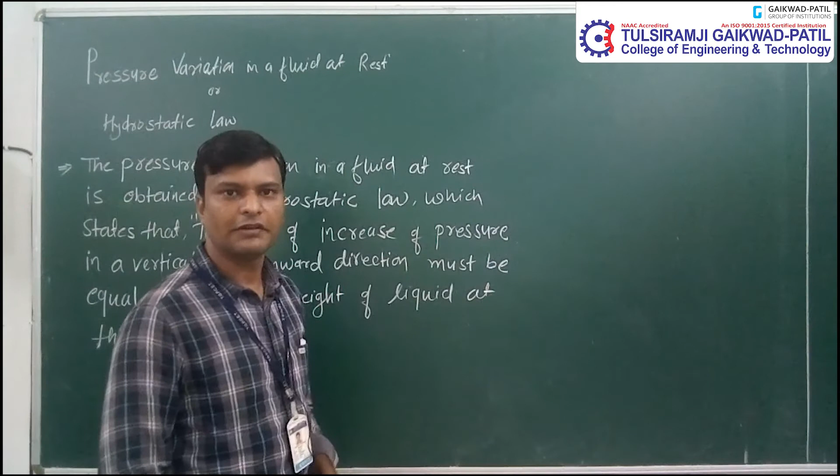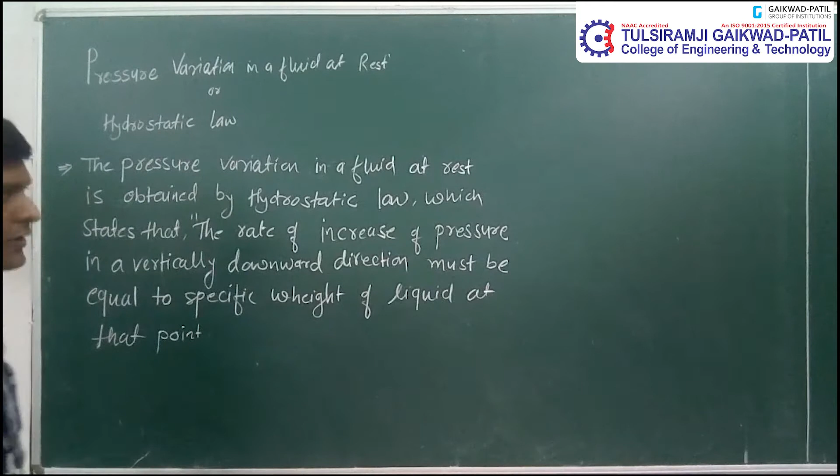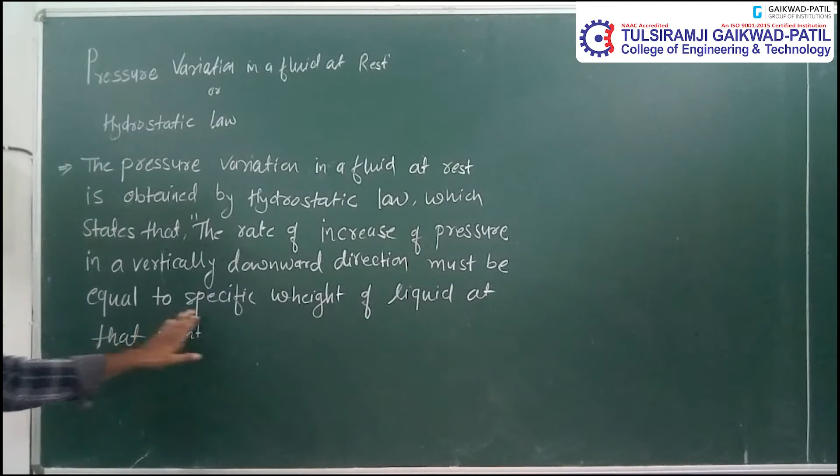Hello everyone, this is Professor Vishwjeet Ambade from Mechanical Engineering Department, and today's topic is pressure variation in a fluid at rest, or we can say the hydrostatic law. The statement of the hydrostatic law is: the rate of increase of pressure in a vertically downward direction must be equal to the specific weight of the liquid at that point.

For that we consider a container having liquid, and this is the small fluid element, having delta H, and this is the height of the fluid element from the free surface of the liquid.

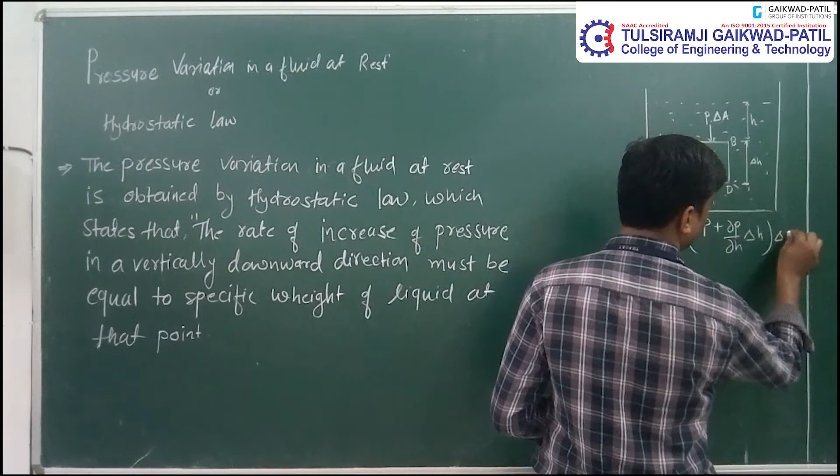This is the pressure which is acting on the face AB, which is considered CD, ABCD, and this is the small area. You can say that the small area delta A is the small cross section area of the fluid element, and this is the pressure which is acting in the downward direction. Delta H, this is del H, and this is delta A. So this is our consideration.

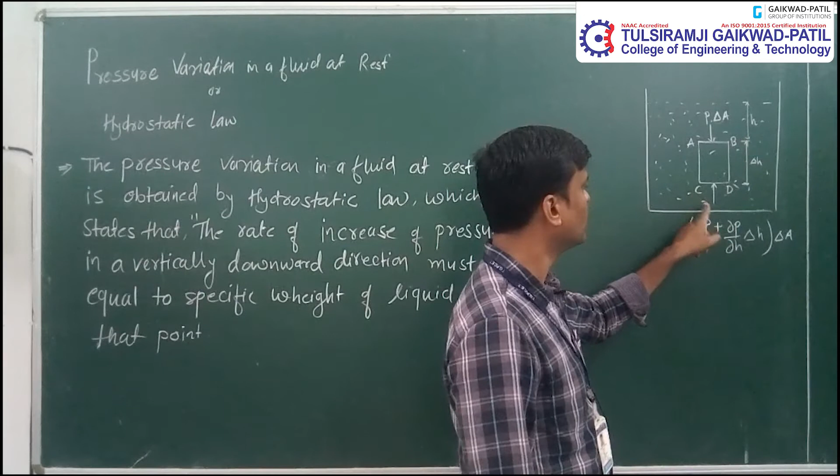What we have considered, this is the small fluid element to be considered. Delta H is the height of that fluid element. Small h is the height of the fluid element from the free surface. P into delta A is the pressure force acting on face AB, and P plus del P upon del H into delta H into delta A is the pressure force acting in the vertically upward direction on face CD of that particular fluid element. So this is the statement.

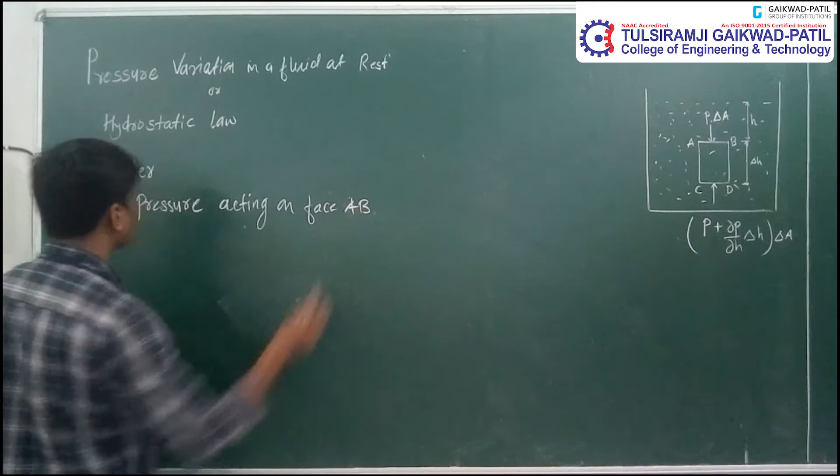Now consider small p be the pressure acting on face AB, delta A the cross sectional area of the fluid element.

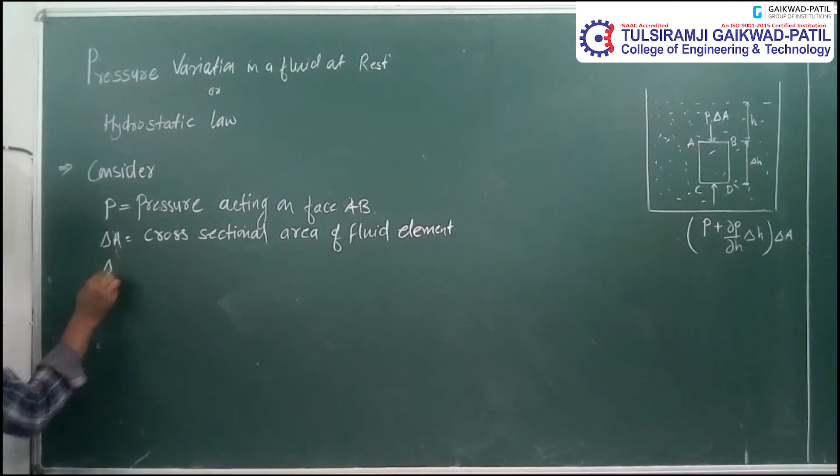Delta H is the height of the fluid element. Now small h is the distance of the fluid element from the free surface of the liquid. Is it clear?

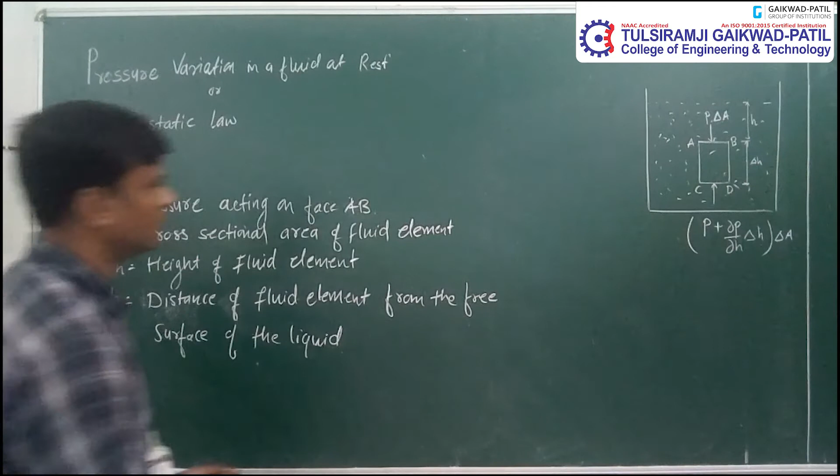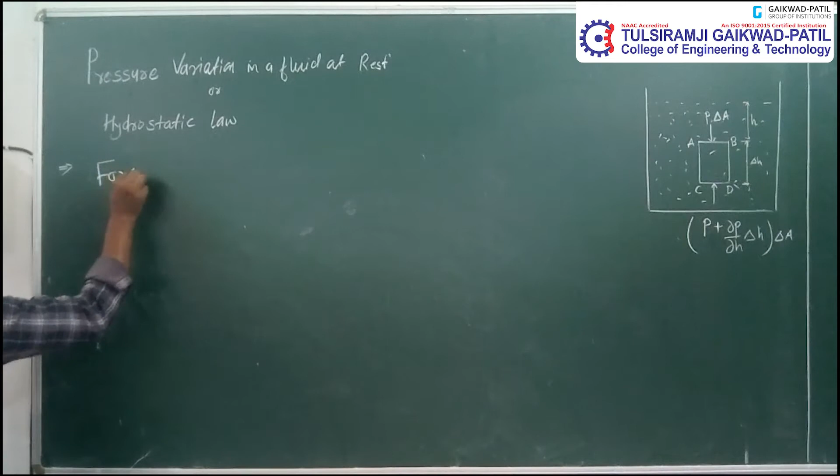Now these are our assumptions. So again now, forces on the fluid element. Now what are the various forces acting on the fluid element?

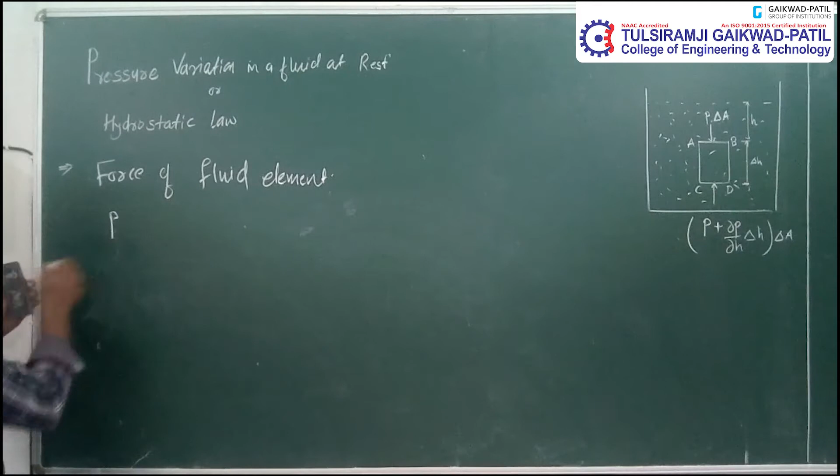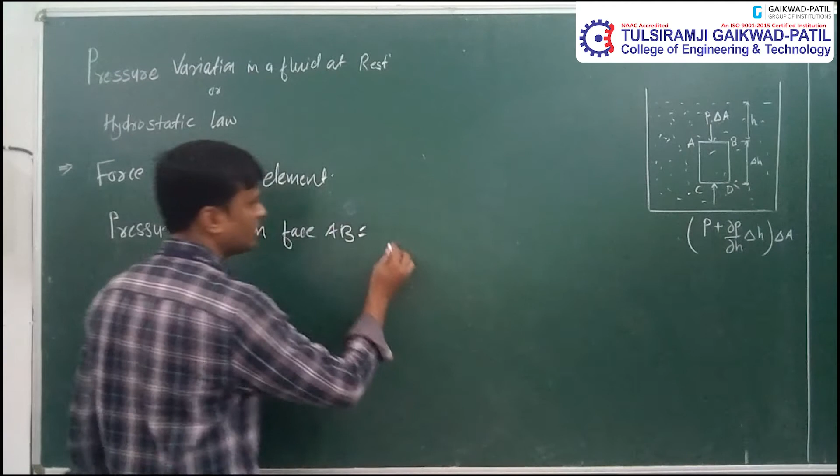So first force is the pressure force on face AB. This force which is acting on face AB is P into delta A.

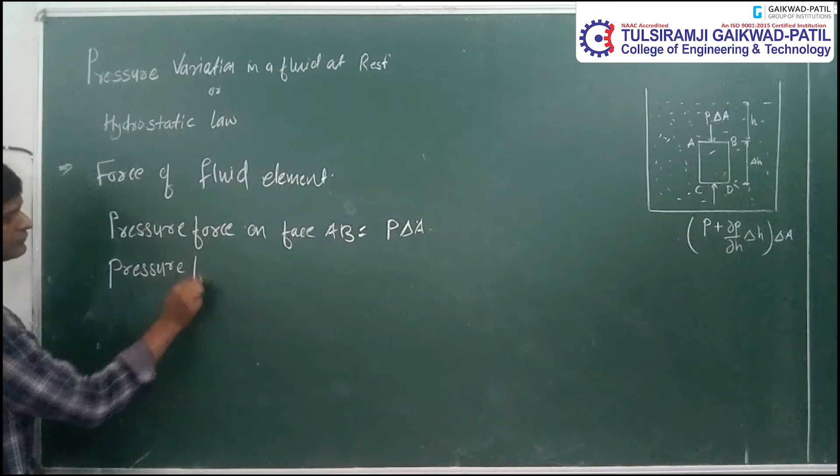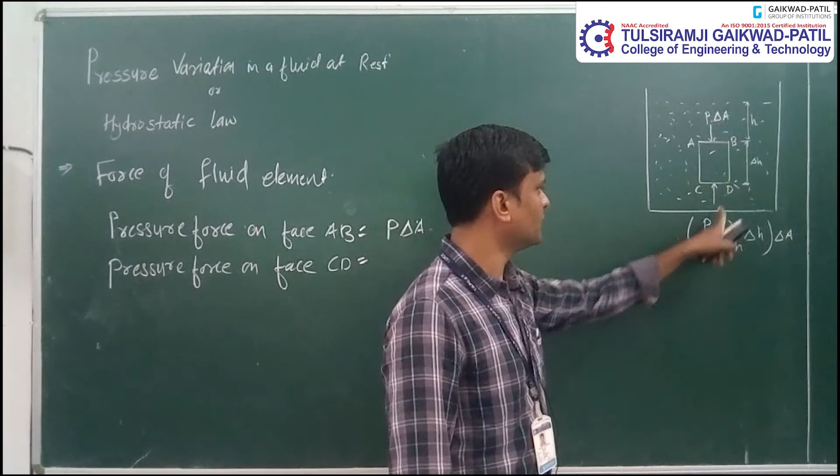Now, pressure force on face CD. What is this? This is the pressure force acting on face CD in the vertically upward direction. How much? P plus del P upon del H into delta H into delta A.

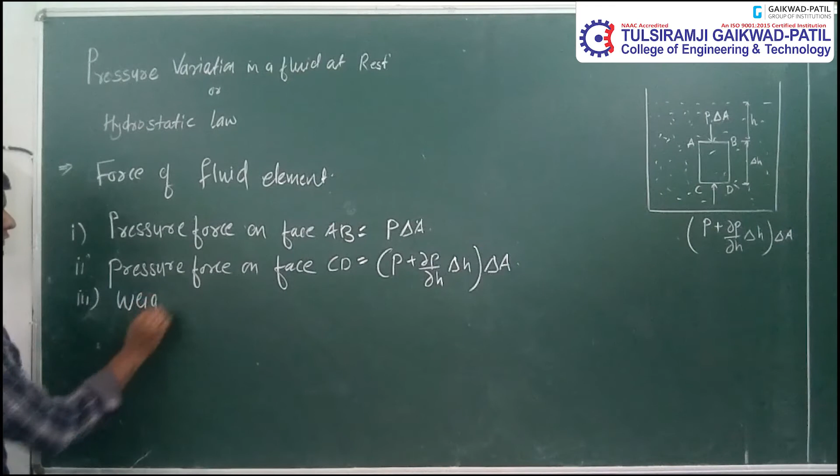Now third, weight of the fluid element. The weight of the fluid element is again acting in the vertically downward direction. And what is the weight? Density into volume. So the density of the fluid element is nothing but rho into G, and volume is del H into del A. This is the volume and this is the density of the fluid element.

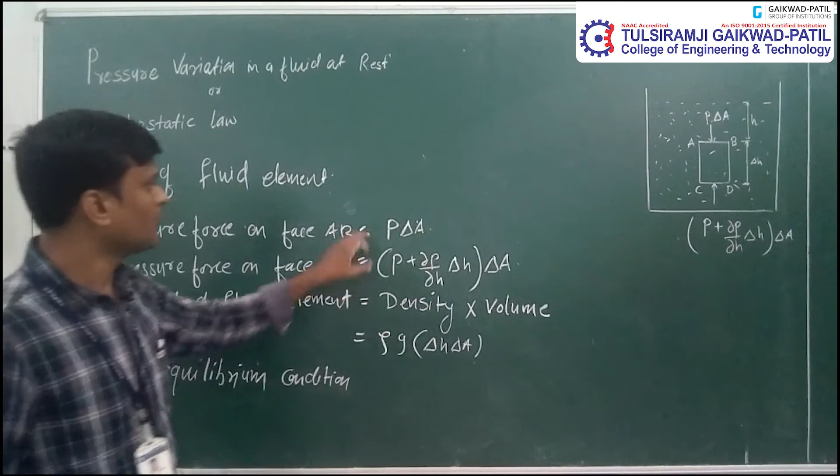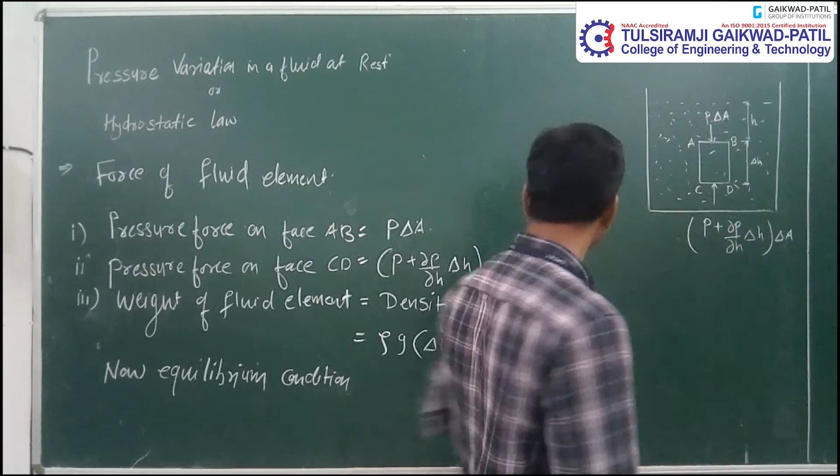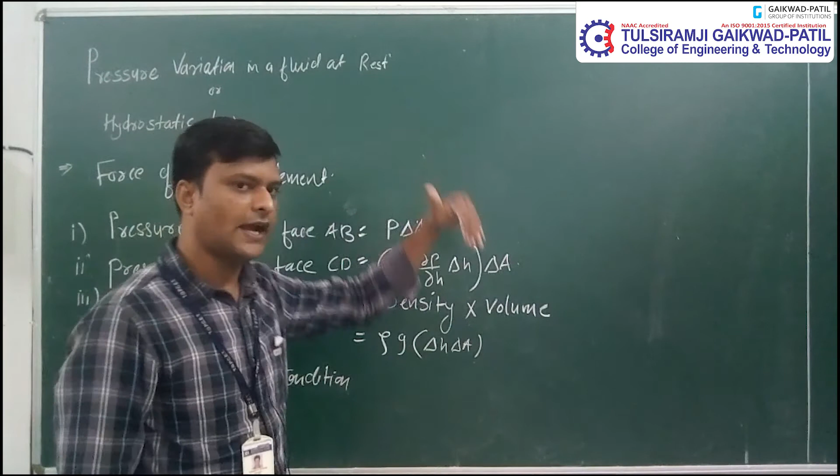Now for the equilibrium condition, we can see here, this is the force P into delta A which is acting vertically downward on face AB, and this is the force acting vertically upward on face CD, and simultaneously the weight of the fluid element which is again acting vertically downward. Therefore, for the equilibrium condition, there are two forces acting in the vertically downward direction, and one force acting in the vertically upward direction.

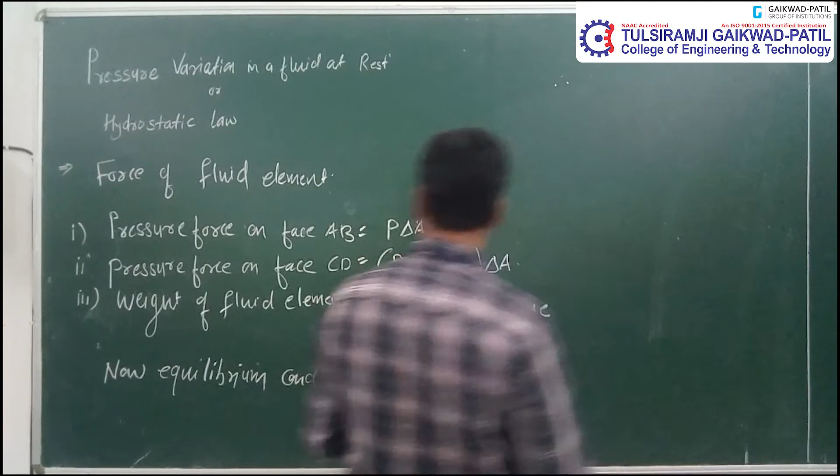Therefore, if we consider the vertically downward direction force as positive and the vertically upward force as negative, we can write: P into delta A plus rho G delta H delta A minus P plus del P upon del H into delta H into delta A is equal to 0.

Therefore, after solving this: P into delta A plus rho G into delta H into delta A, minus P into delta A, minus del P upon del H into delta H into delta A is equal to 0. Now the positive sign and negative sign cancel.

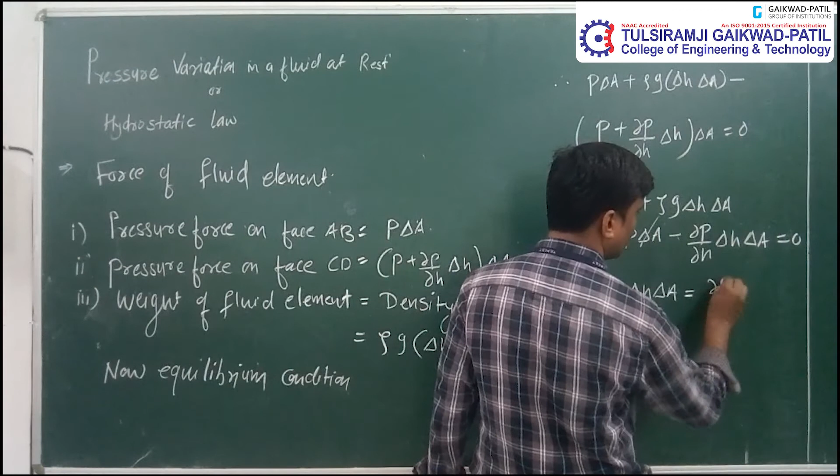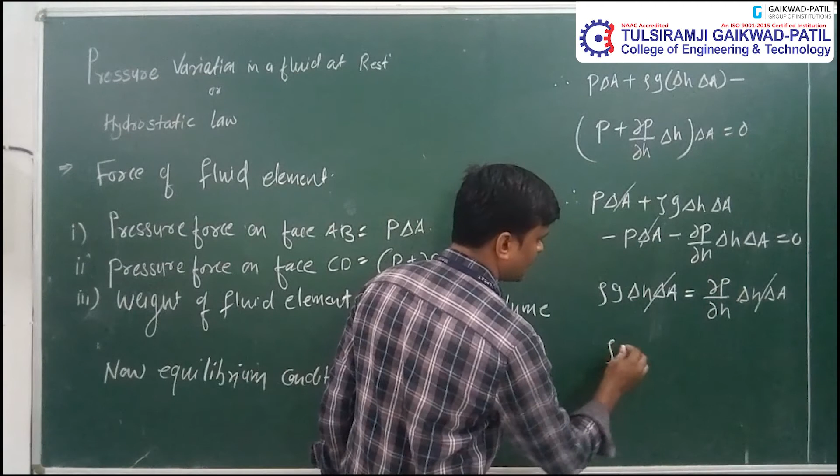What remains? Rho G delta H delta A is equal to del P upon del H delta H into delta A. Now this is again common, so this is cancelled. What remains? Rho into G is equal to del P upon del H. So again we can write W is equal to del P upon del H.

This means that the change in pressure in the vertical direction is equal to the weight density. This W sign indicates the weight density of the liquid.

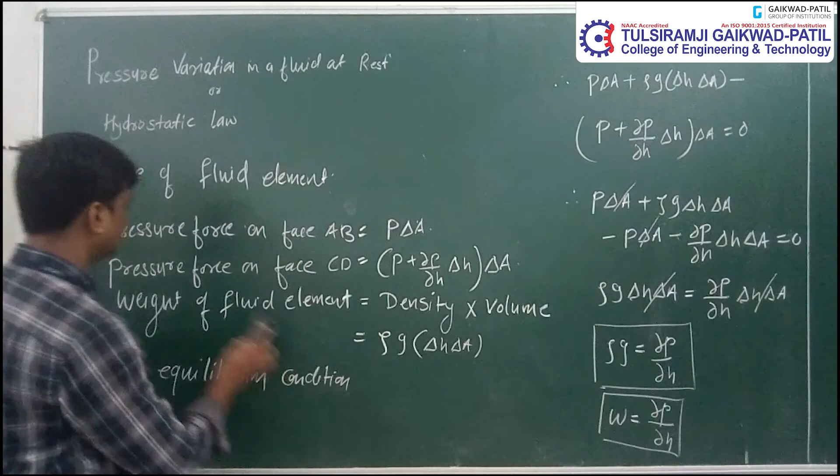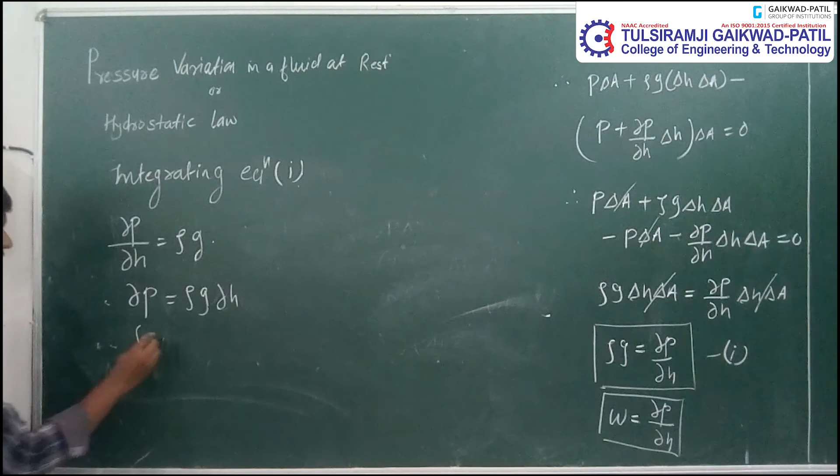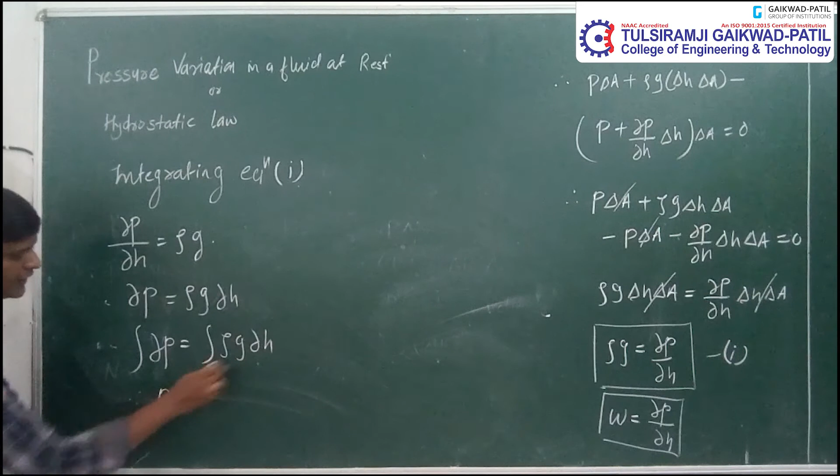Now, if we consider this as equation number 1, after integrating equation number 1, what do we get? Del P is equal to rho g into del h. Therefore, after integration: integration of del P is equal to the integration of rho g into del h. Integration of del P is P, and rho into g is a common constant term, so this becomes rho g h. So this is the equation for the hydrostatic law.